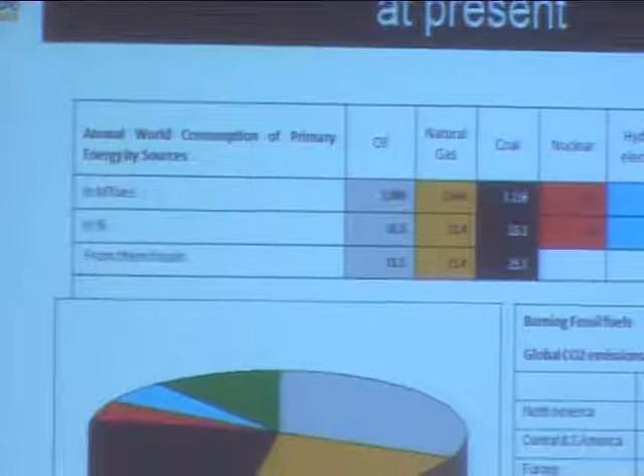My presentation will deal with whether wind energy and solar energy will be able to make up the difference with respect to the decline of fossil fuels that we have seen in ASPO. Most of the speakers have already talked about that, and it seems clear that it's going to be very difficult, and my presentation will go also in this direction. But I would like to put something in perspective.

This is what we are consuming today: about 12 billion equivalent tons of oil in different forms. About 80% of them are fossil fuels, and this is the main cause of what we are emitting now in global CO2 emissions throughout the world, mostly from the more advanced countries.

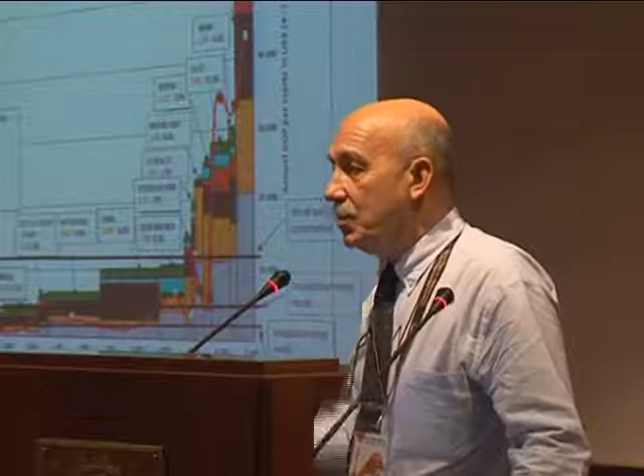This is another form of viewing the energy expenditure. On the right side, we have the rich countries. All this data has also been presented, but I wanted to present it in watts of energy, using the equivalences of the British Petroleum table of equivalences, because this is equivalent.

For instance, the metabolic energy needs of the human body as a naked ape is about 100 watts. The human body is like a machine equivalent to 100 watts of power, working an average of 24 hours a day. Just 100 watts makes us work as a human being, so it's a wonderful, very efficient machine.

This is the pre-industrial level, about 300 to 600 watts, even 1,000 in modern agriculture or something like that. This is the world average today, about 2,200 watts per capita for the 6.6 billion people living on the planet. And this is what we are consuming in different types of energy: oil in gray color, gas, natural gas, coal, nuclear, hydro, and the rest is renewables.

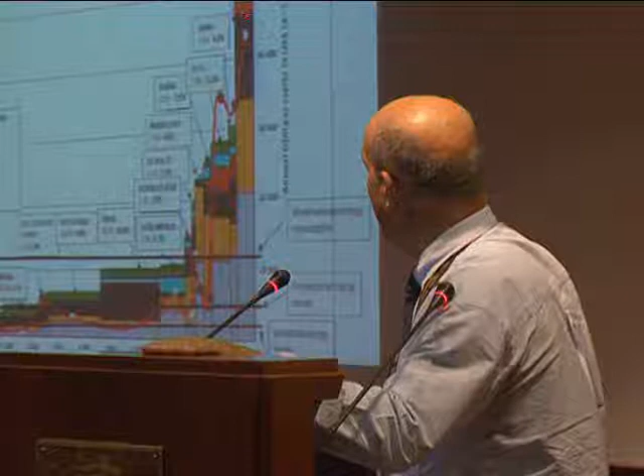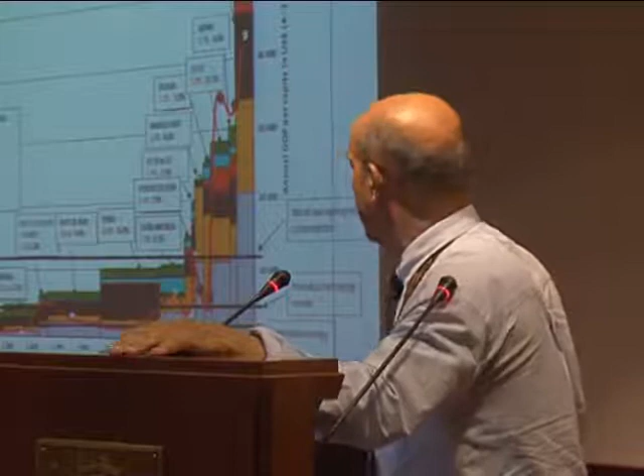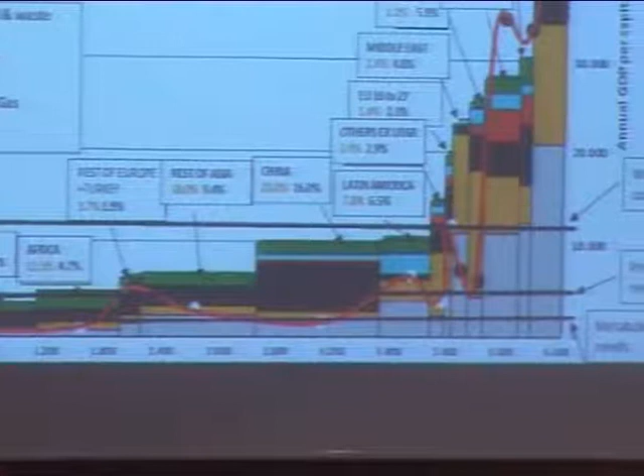If you see China, for instance, they are slightly below the world average. They are reaching the world average very soon, or they are just on the verge of reaching it, because this is 2007 statistics, and they are mostly coal-oriented. This one is mostly oil-oriented with some gas, and of course the case of France with nuclear is very clear. And this is the world.

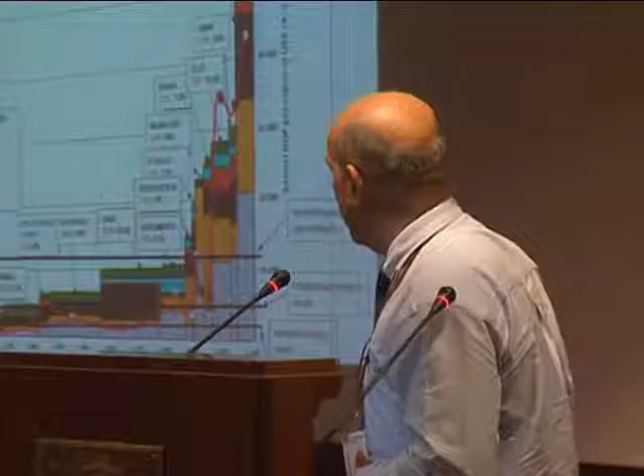We are here, like this. Some of them are 5% of the population and are consuming 23% of primary energy, and some others are consuming much less. I could spend the whole presentation just with this slide, because this explains almost everything.

This explains why these people are migrating to those areas. This explains why the resources, mainly in those areas - exception made of the Middle East, which has a lot of energy here - are being sent to the other areas. This explains the Pareto principle, in which 20% of the human population is consuming 80% of the energy, and the rest, the other 80%, is just consuming 20% of the world energy, and this disparity is creating a lot of problems.

So the problem is that the GDP, the red line, is very much related to the energy consumption, an identity. And the CO2 emissions as well. There are some singularities here - for instance another singularity here in Europe, we say that we are more efficient, but sometimes it's because we are outsourcing polluting activities to third world countries.

I don't know what I did. Okay.

So, in fact, CO2 and GDP are very much related to energy consumption. This is what I wanted to show. And the model is broken. We know perfectly that the 2,200 watts world average is not sustainable. We know that very well.

We are burning forests, we are exhausting the water resources, we are exhausting the fossil fuel resources and everything. So it's clear that the people here will have to think in ways of living, of going somewhere at this level of energy expenditure, because otherwise the planet will not resist.

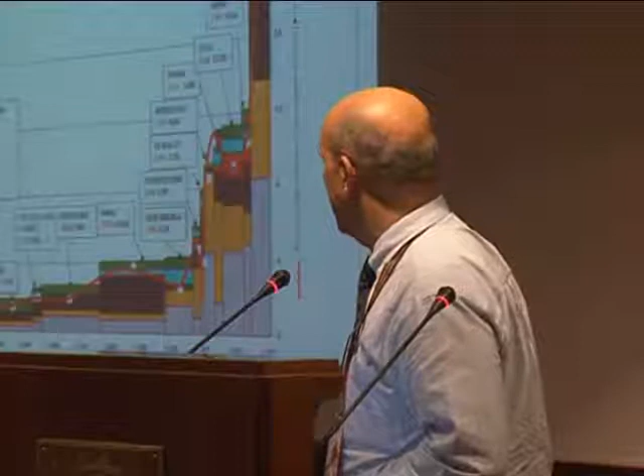But going to the American way of life, it should be about 5 times. So it's not sensible to do that.

We are the modern man, this is the Homo sapiens, and we are the Homo technologicus, and we are now at the level of 12,000 watts per capita. 12,000 watts means that from the human metabolic point of view, we could live with one light bulb on our head of 100 watts, but these people are living with 120 bulbs lighting on their head. It's like an ambulant circus.

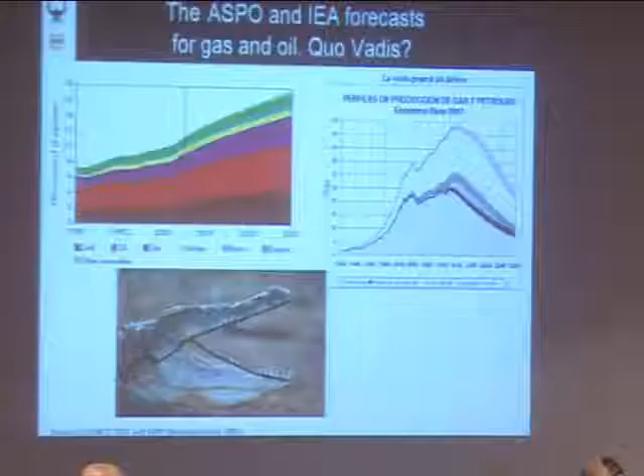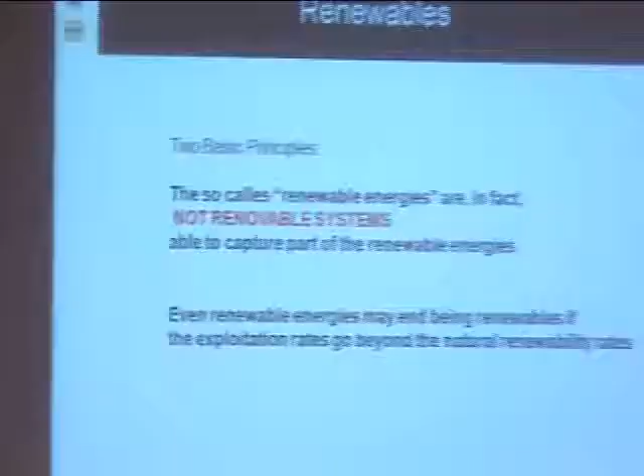And then this is what we call the oiligator. This is the growing gap, and this is me exploring what is going to happen with the growing gap. Let's see what is going to happen with wind and solar, for instance.

First of all, two basic principles. The renewable systems, in fact, are non-renewable systems able to capture renewable energies like wind and solar. But the systems themselves are not renewable. And even renewable sources may end up being exhausted if we go beyond the natural renewability rates.

This is a list. I'm not going to go through the whole list of renewable energies. What solar and wind mainly are producing today as alternative energies — of course there is solar thermal as well, and it's important — but it's electricity.

But if you look at the spaghetti diagrams being produced, this is an excellent spaghetti diagram I took from the Oil Drum, thanks to the Oil Drum, which is an excellent web page — this is the United Kingdom in 2007. This is the electricity portion of energy in a nation. It's a tiny portion that they are using.

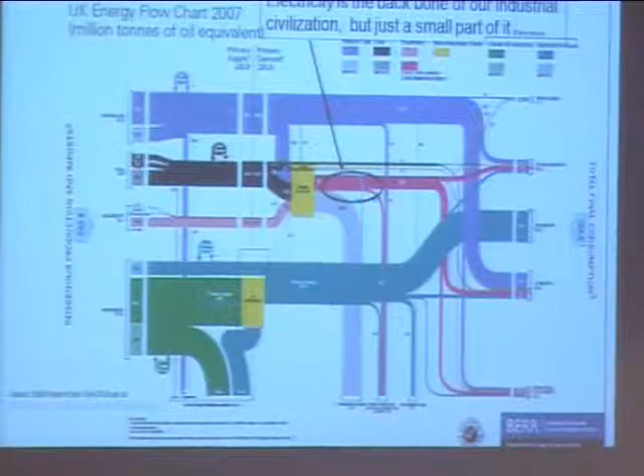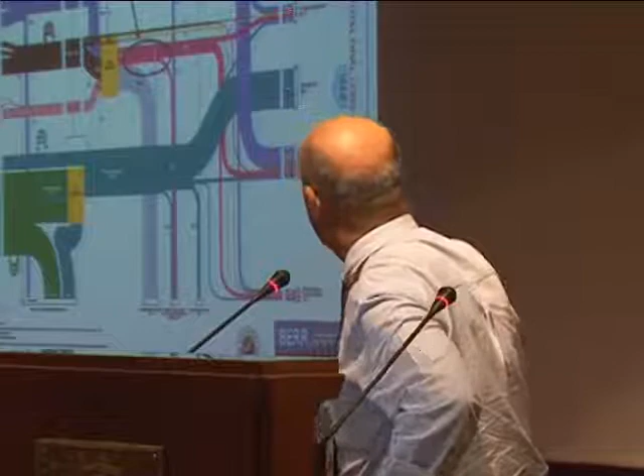They are using more primary energy to produce the electricity, but then most of it is going in losses, and then this is going to useful uses of the energy. I don't know whether this is domestic use, or transport use. In transport, electricity is not very much used, it's mainly oil, but this is the main use.

So, in principle, the most immediate thing is to replace this with renewables, but the problem is not only in the electricity, the problem is in the whole spaghetti diagram. This is Spain, and how do we do it? Well, we have some problems.

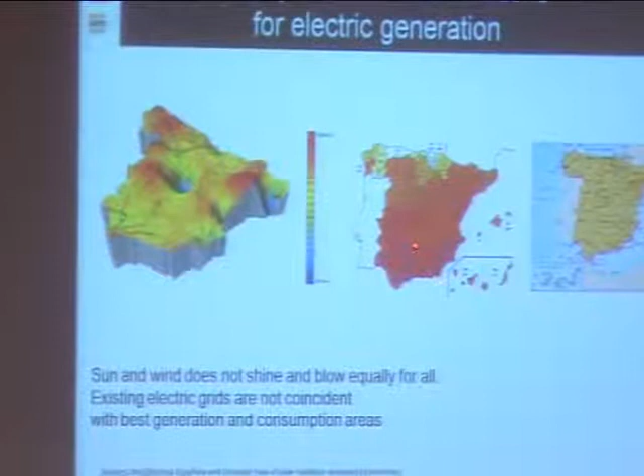Previous considerations: the sun and wind do not shine and blow equally for all. It suns here — this is the solar map of Spain. It's much better in the southern part of Spain than in the northern part of Spain.

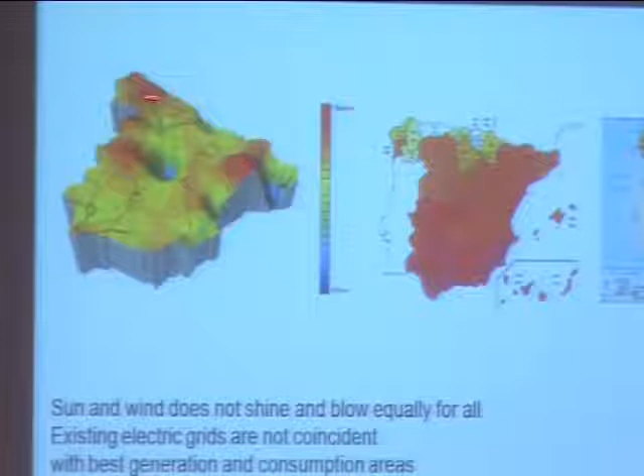And then this is the consumption and the production. Consumption is the holes, the sink sources, and production is where we have the nuclear power plants and the thermal plants and so on. And these are the electricity networks. So if we have sun here, and we have the main electricity networks here and here, then we have to create a whole network over there.

If we have wind in the Gibraltar Strait or in La Coruña, in the Atlantic Ocean, where we have most of the wind, then we have to create new networks as well. And this is expensive, costly, and takes time.

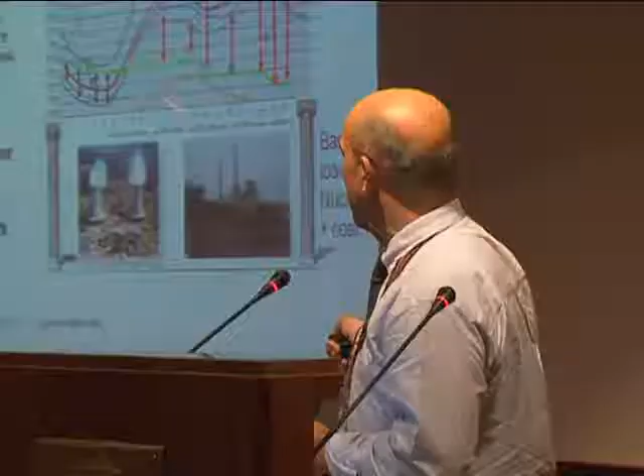This is how we consume electricity today. This is the base load, basically covered by nuclear and coal, which are difficult to moderate. They cannot be switched on and off freely, because they have to work—they can only be stopped on an emergency basis or for maintenance. But normally they are producing up to 20,000 megawatts in Spain, and this is day and night.

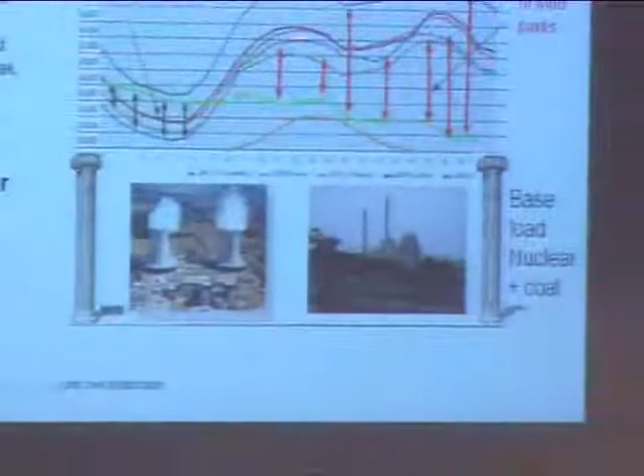The rest of the day, they are being covered with the rest of the energy sources. These are the different diagrams from the maximum in one day of the year to the minimum of another day of the year.

The problem is that wind is unpredictable. This is the wind in Spain, more or less—this is the chart of one normal day in Spain. We have plenty of wind. We can generate, if the day is very windy, about 10 gigawatts of electricity from the wind. So it's not a bad situation, but the problem is that maybe when we need it, on this day there is no wind, and then we have to figure out how to generate.

In solar energy, we are approaching much better to the consumption curve. And this is the situation.

This is a diagram from Red Eléctrica de España, the power utility, the regulator. Electricity is not stored, so you have to switch on and switch off when demand is growing—almost instantly, on demand. You detect the demand and you have to switch on power plants accordingly, because otherwise the grid can be destroyed. How to store?

To store is a problem. In Spain, we have pumped-up consumption. This is what we are consuming in gigawatt-hours in a year, and this is what we are pumping up—just 1.6%. So it's very difficult to store electric energy.

So when people talk to you about storage, take the data, analyze it. Don't trust people just by that—don't take their words for granted. Take the data and see how much can actually be stored.

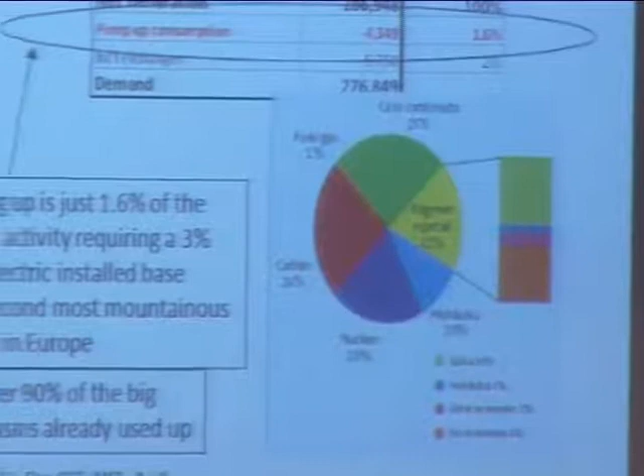And then for the rest, how are we going to do it? Okay, now I will get into wind energy.

This is a drawing made by a famous painter about Don Quixote. We have a long experience with wind in Spain.

Well, we are limited here. This is the formula in which we are generating. Basically, the formula for generating electricity with wind is that generation is proportional to the square function of the diameter of the blades, but is a cubic function of the wind speed.

So if you take the wind speed, these are the different classes of wind fields, from class 6, which is the best, to class 1, which is terrible. This is the average yearly speed, and this is the megawatts generated. So, for instance, if you have a 2.3 megawatt wind generator, which is the one I'm going to use as an example, you may generate 2.2 at nominal capacity with this type of wind, and so on.

But if you have to go to another wind field, not very different in speed, then you may have to either double the number of wind generators to get the same energy, or else you will not generate enough energy.

And let's see how it works. This is an example of a commercial company, Nordex, but I could have used another Spanish one, which is very good—Gamesa as well.

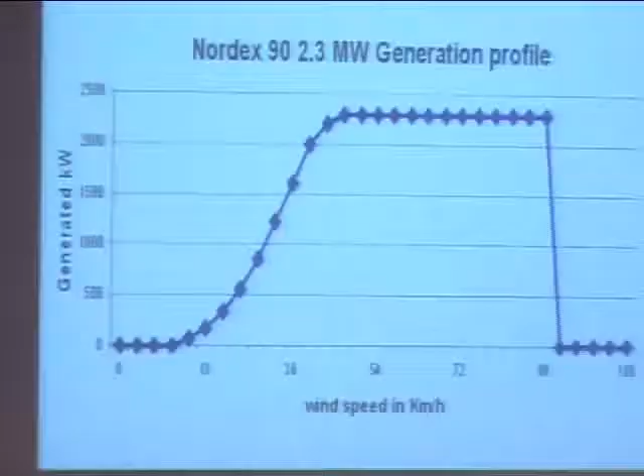They are now mostly producing 2 megawatt wind generators. This is the state of the art. They have even shown the 5 megawatts; I will also show the 5 megawatts. But they are not producing nominal power all the time. They are producing when the speed in kilometers per hour reaches up to here.

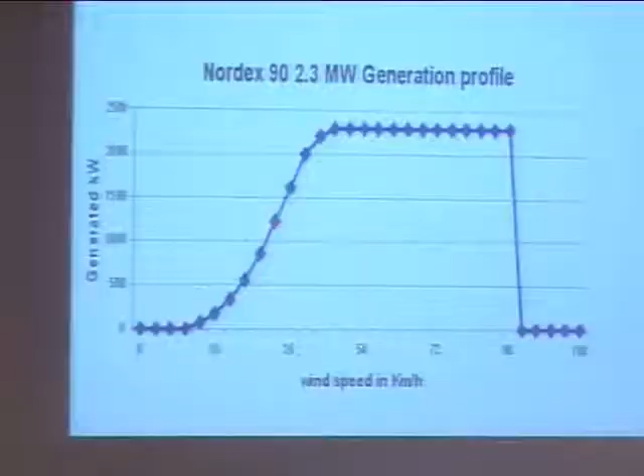If the wind is at that level, they are producing much less. And if it is over 90 kilometers, they have to put the blades in feathered position, and they will generate nothing. So in tornadoes and so on, they will not generate anything, even though the wind has a lot of energy inside. So that's the situation.

So it's competitive, it's powerful, it's proven, and it has an EROEI that is probably superior to solar photovoltaics. It's not very polluting. Well, we will see then if it is very polluting or not. But it's intermittent supply, it needs conventional backup plants, so this makes it less efficient. We are happy because we now have the backup already installed, so we are not considering that problem. But if we had to reach 100%, then we will have to keep the backup.

It just produces electricity, so we have to use energy carriers if we are going to solve, or we pretend to solve, something from wind in the transport world, for instance. And going beyond that, it needs the carrying vectors.

So the load factor: although they have mentioned that the Canary Islands has 3,500 to 4,000 hours a year of nominal power for the load factor for the wind generators, normally in the peninsula, in mainland Spain, this is the ratio and this is the average experience.

And this is not too much, because this is the top-down analysis that normally is not done by the industry. It would be almost impossible to try to capture 1% of all the winds in the planet. But of all the winds, the 1% would just be 70% of the primary energy, and I think we are very, very far from being able to capture 1% of all the winds in the planet. So they are saying that this is renewable energy.

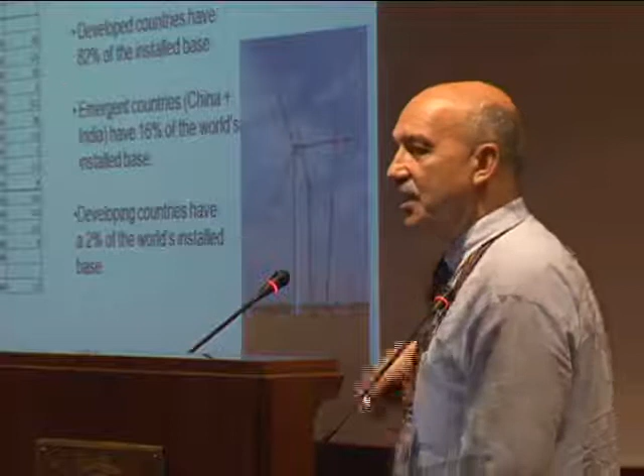In Spain, we were second in the world after Germany. Germany has 23,000 megawatts. Now the USA has already passed us very fast. They are at 20, we are at 15,000 megawatts. We are producing 10% of the electricity on average at the end of the year. Germany is also 10, 11. The USA is only 1.5, even with more than us, because it is a giant. And then the rest is over here. The total is 102,000 megawatts, and this is about 1% of the world electricity consumption.

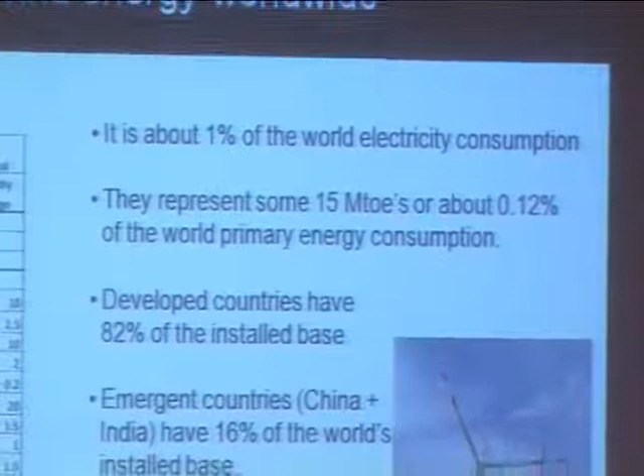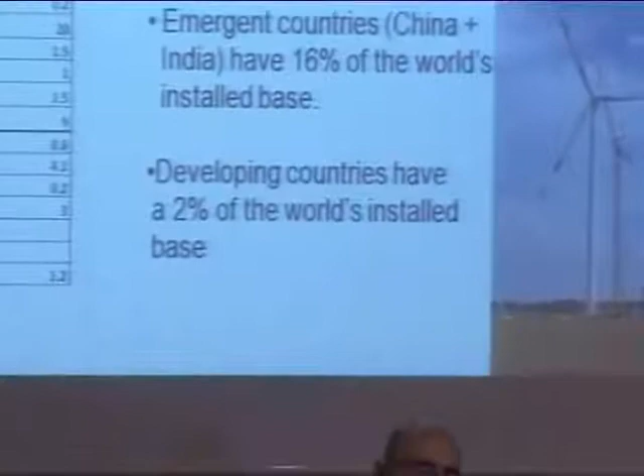But what else? Well, another problem: we have been talking about financing, but if you take all these figures, 82% of the world installed base is in developed countries, which have policies favoring the installation of wind energy with budgets specifically devoted to it. So if those budgets were not available, and those budgets are from governments and societies which are fossil fuel fed, this figure would probably be not 100,000 but 1,000, because the rest of the world that is not promoting it very much is almost not installing anything.

Oh my God, 5 minutes only. So this is some more data. I don't know what. Well, I'll go to the summaries.

So with respect to wind power, all the wind power in 2007, this is the installed base, and it produced 5 times less electricity than the world electricity consumption increased between 2000 and 2007. And the world 23 times less. Okay. So that means 23 times less is just what was installed in 2007. The world park produced 5 times less.

So it seems that the energy consumption of fossil fuels and the increase of the primary energy consumption is going 23 times faster than the wind power. Just the growth, not the consumption. So we are going to have difficulties. I have many other charts. They will be at your disposal.

In solar energy, I will not repeat that. I would like to mention just a couple of things. One of them is the common belief that prices will go down if we produce massively. That's not true any longer. We have seen the Ugo Bardi presentation. The more we use material, the more we use steel, concrete, and so on, it's going to be more difficult if fossil fuel energy is not available or is starting to become scarce.

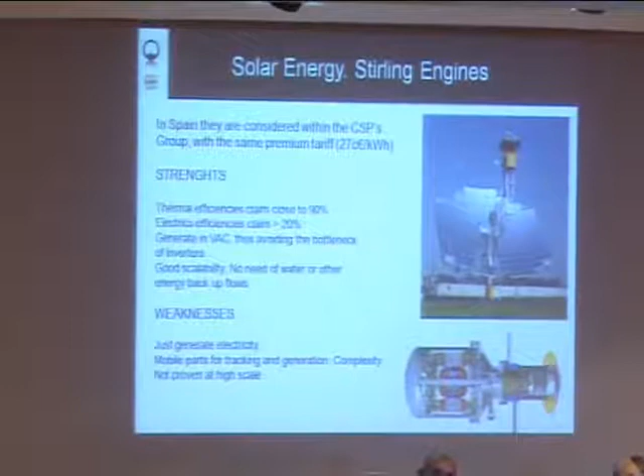This has other technologies. These are the Stirling engines, which do not require the same technology. They have some advantages, but the weakness is that they are just in a training phase. This is a commissioning plant. And now let's go to solar photovoltaic, if I am given some time.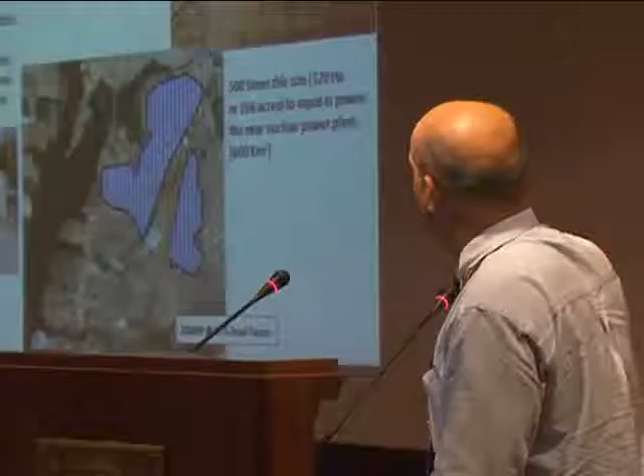Close to the farm I own, they have already connected to the network 20 megawatts of solar photovoltaic with 2-axis trackers. This is close to a nuclear power plant of 2 gigawatts. It doesn't appear here. It's the Almaraz nuclear power plant, 2 units of 1 gigawatt each. So this is 2 gigawatts, and this is 20 megawatts.

So we will need 500 times this size, 600 square kilometers of solar panels, sophisticated solar panels produced in very sophisticated and complex industries, to produce the same electricity as this tiny piece of land.

Even I am not a fan of nuclear power plants. And then another problem is that the maintenance is very complex, and when you install this, normally in third world countries, the problem is the maintenance because they are very difficult to be maintained. So the government has been overwhelmed because they prepared 400 megawatts, and now we are going to end this year probably with 1.2 gigawatts of solar power installed.

What I want to say is that this has been taken as a financial business in Spain. We have been very successful because we have handled it as business as usual, not because we have handled it as an opportunity to generate clean energy. There have even been banks, a Spanish bank, that have offered through their private banking a financial product to their customers, which is photovoltaic plants.

And this is not logical because the Spanish government is subsidizing 4 out of 5 units of money of the electricity produced. And the banks are financing this because they can recover the investment, because they have the guarantees of the state that for the next 25 years they are going to keep this tariff working. So they trust in the Spanish state and they finance. But if you go by yourself, they will not finance anything.

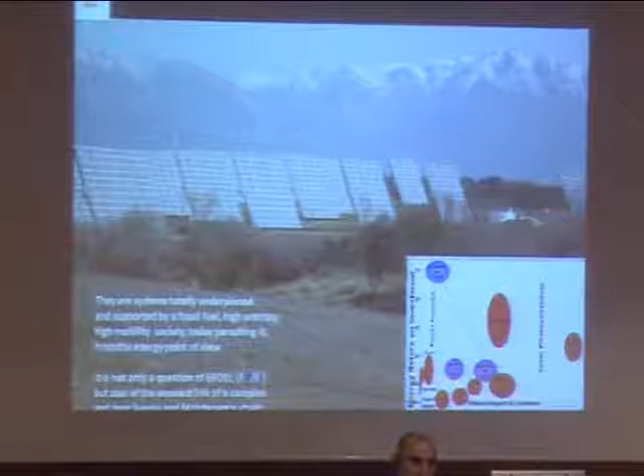This is the chart of Charles Hall. I took the chart of Charles Hall, and this is where he put the EROI of solar photovoltaics at 5. I think he is very optimistic. Within 1 or 2 years, I hope I will be able to include the maintenance cost and many other costs of the manufacturing, not only of this type, but all other conventional types of solar photovoltaics, and really they are going to be much closer to the EROI of ethanol than to what the industry is claiming, that they recover the energy in a few months. Sorry, I have many other things.

This is just one of the scenarios in growth as usual, taking ASPO, and then what will be required. I don't know, I am out of time. This is the typical growth, and then they say, but you are brutal because you are proposing that everything is going to be solar and everything is going to be wind, and the ideal thing should be a mix. Okay, I have prepared a mix here. I did not abandon oil, natural gas, even coal.

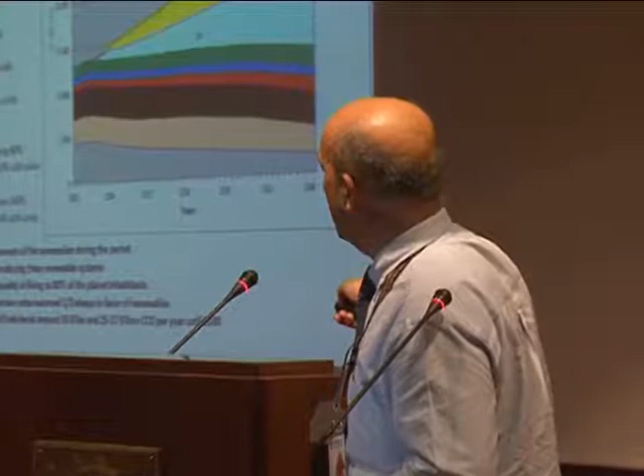I follow the Energy Watch Group recommendations, uranium, hydro. I did a very big increase on the biomass, and then I put here wind and I put here solar with all these criteria: 3% annual growth, the business as usual, what our ministers are still dreaming to have. The technical improvements, I put 1% increase, the oil and gas as per ASPO, the coal as per Energy Watch Group, nuclear assumed to more than double, so I'm not being anti-nuclear here, biomass and waste, all these things.

Wind growing from 100 gigawatts, growing 80% up to year 2050, and then 50% of the growing cake, and solar growing from 8 gigawatts, 260% yearly, and then 50% of the cake after 2015. The result, and I have ignored the necessary replacement of the renewables, I have ignored the energy spent, the EROI, I have ignored many other things, and this is what we will have to spend.

This is growth and challenge. In solar, for instance, we will have to put 12,500 times the present world installed park. This will occupy 700,000 square kilometers, and the cost will be 600 trillion euros at present prices. So these are the two alternatives.

Either we go on and we do not solve the problem, or we work like the wise frog and try to solve the problem, as Jorge Riechmann, who is a philosopher, I don't know whether he's still here, mentions: we are not living ordinary times, and what is impossible in ordinary times is made feasible in extraordinary times.